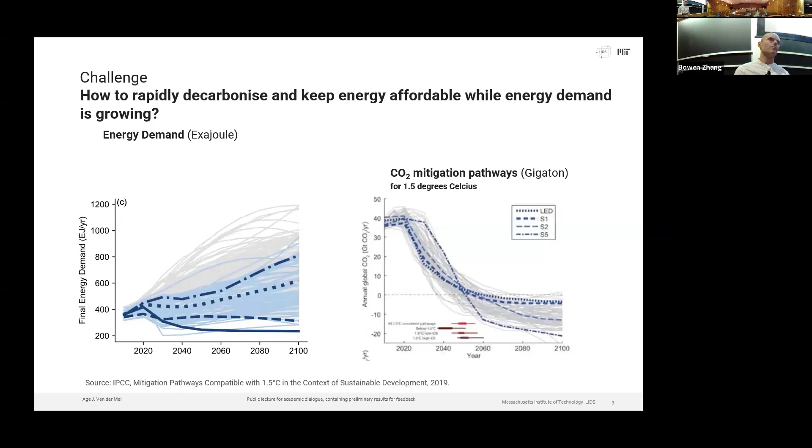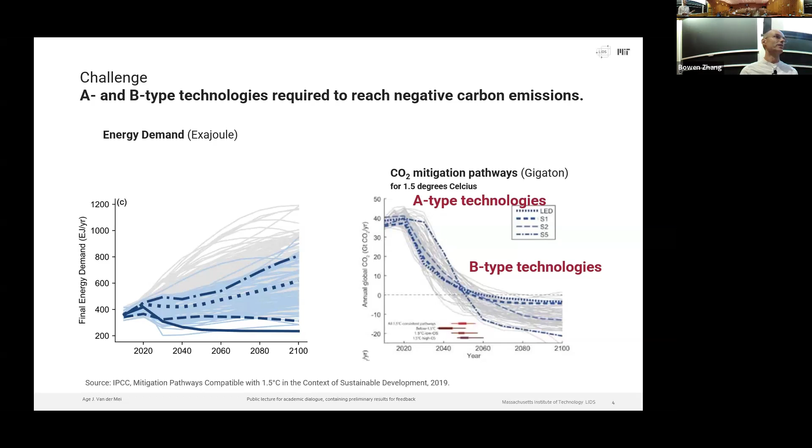Okay, what's our challenge? The challenge we're addressing here is, of course, meeting a rapidly increasing energy demand while at the same time reducing our CO2 emissions. This is going to take new technologies and the ramp up of the technologies we already have. So I love that distinction that the MIT conference is making, type A and type B. And today we're going to mostly talk about type A, about rapid scale up of solar, wind, batteries, and electrolyzers.

And this is a rapid scale up indeed. I looked up the numbers, and as these technologies are progressing, the rates of build out for the batteries and the electrolyzers are even faster than the build out of solar. And we all know that the solar build out is going at a tremendous pace. China last year reached a terawatt production capacity in solar. That's a number to really make us stop and think where this is going to go in the coming years.

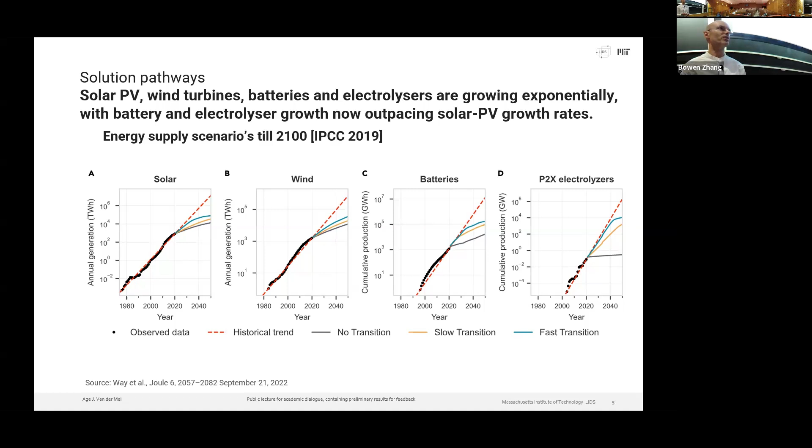First, let's look back. Because only through looking back can we hopefully look forward into the future where this is going. And this is actually the first large-scale electrolyzer in the world. It's a plant in Norway. It was 135 megawatts at the time, an alkaline electrolyzer. And it was used for industry purposes, so ammonia production.

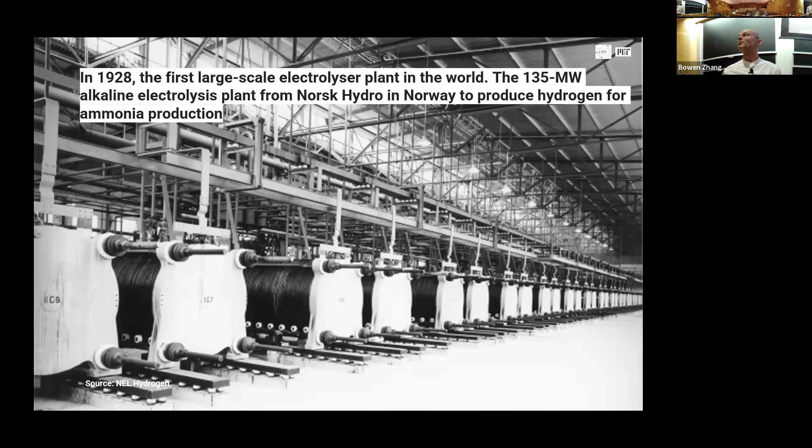And as you see, it's very similar to the modern day electrolyzer, which looks like this, which is part of a 500 megawatt plant that's being built in Texas. And this is the scale level. So hundreds of megawatts is becoming the new normal for electrolyzers.

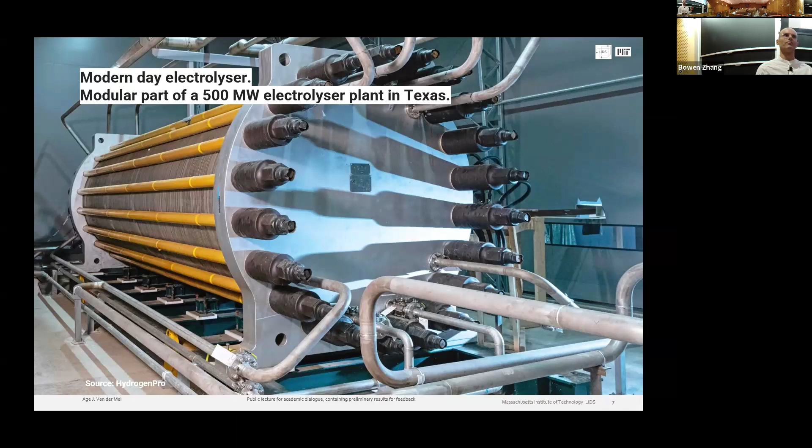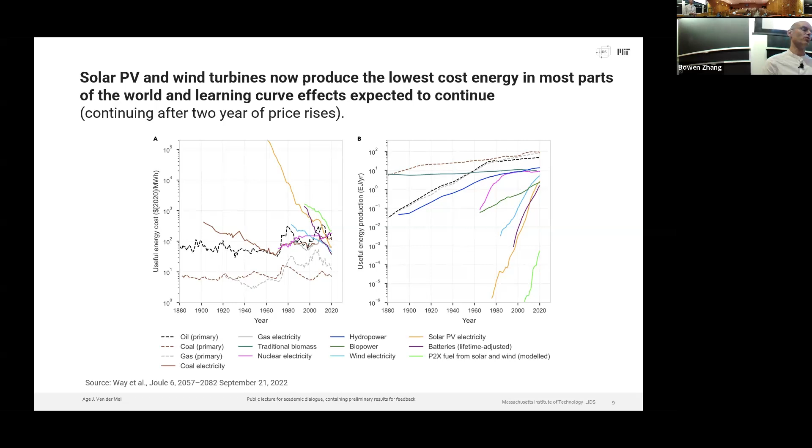And what is driving this is, of course, this rising energy demand, but also the rapid drop in investment costs. So I'm here showing this cumulative cost drop on the left side. Solar, but also wind, is coming down on a logarithmic scale, even surpassing the costs of fossil fuels at the moment, and the electrolyzers and batteries are not very far behind.

All right. And then policymakers are catching up to this. There's a target for 10 megatons of hydrogen and 10 megatons of hydrogen imports that should all be renewable for the EU. These are enormous amounts. And this is, of course, driven by the problem of sourcing natural gas in Europe at the moment.

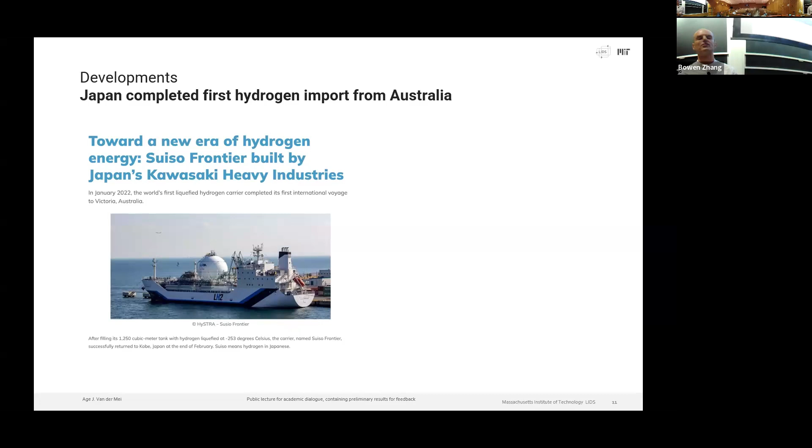Another important development that I want to highlight is that Japan has been importing the first hydrogen from Australia. This is a game changer. And it raises the question, how much import and export are we going to see of this hydrogen? But it's going on. And then quite quickly, the question emerges, at least for our team, where are the global low-cost sources? And where can we expect this very large-scale hydrogen to be produced?

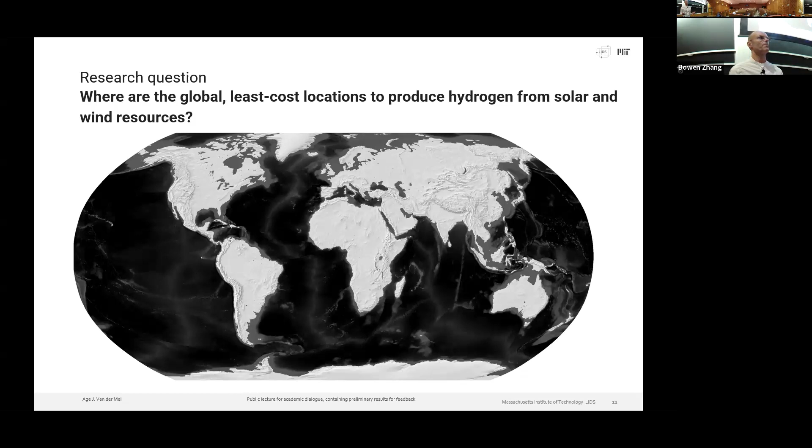Let's go into this analysis a little bit more. First of all, I'll share how we are tackling this problem. We've divided the world into a 0.25 by 0.25 degree grid cell. That's about the size of Greater Boston, so 30 by 30 kilometers.

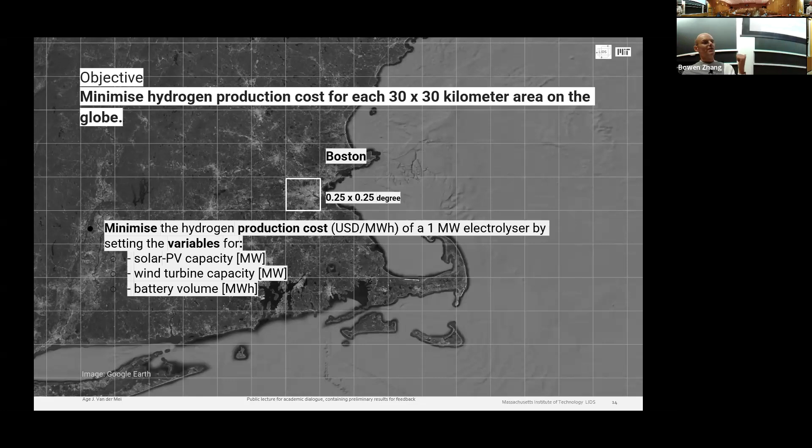And at that grid cell level, we're looking at 10 years of data for solar and wind, and then determine what is the optimal size for the solar PV, the wind turbine, the battery storage, and the electrolyzer system. And then we minimize the production cost of producing that hydrogen.

And to put that into perspective, I've here put up for us these grid cells, and it's not an out-of-this-world amount or size, because here we're looking at one of the largest solar plants in the world. This is the Bhadla Solar Park. It's in India, in the north, and already it's at 3 gigawatt solar.

And you see the size, it's in the top of the white box I'm drawing and at the bottom right. And it shows the size of what we are already now building out. And this is just the start.

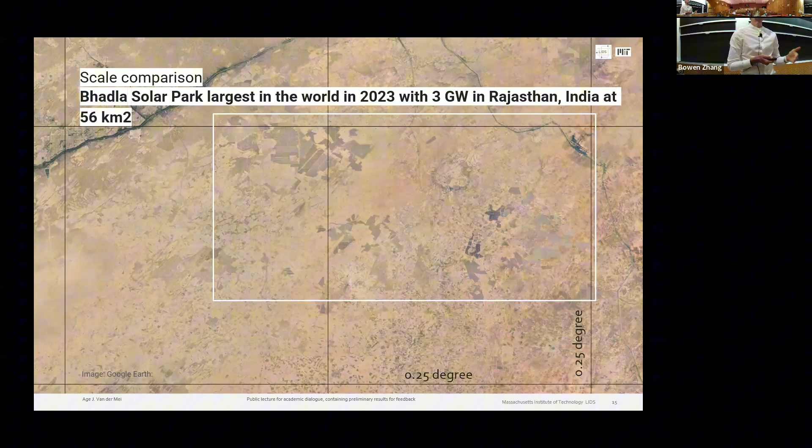So continuing on the method, because if we are looking at a 30 by 30 kilometer grid size, we have to do that for the total world. And that requires a formulation of the problem that still allows you to optimize every location. So this is how we approached this problem. We have the input data. We first determine the capacity factors, wind turbine, solar PV. Then we determine the daily optimal battery storage, and that goes into the optimizer for each location.

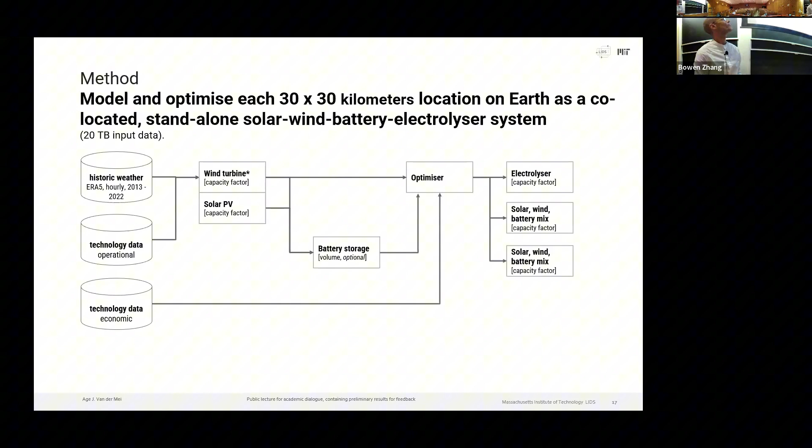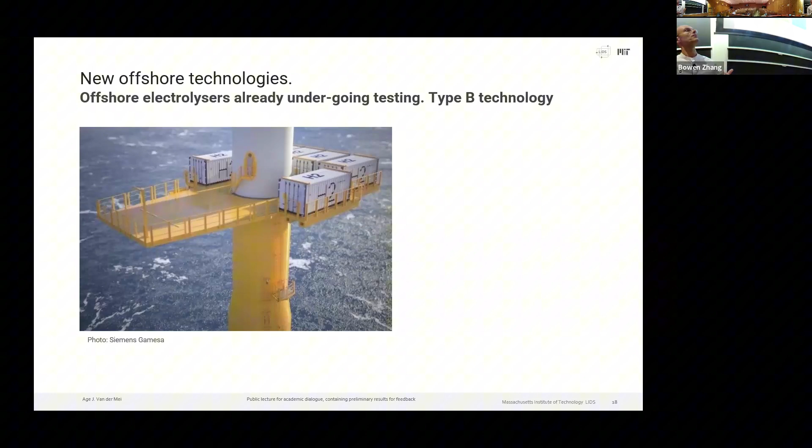And then we're looking at some new technologies as well, because we're including offshore wind, offshore solar, and also offshore electrolyzers. And here I'm showing a picture. It's from Siemens, where they are testing putting the electrolyzer offshore on a wind turbine.

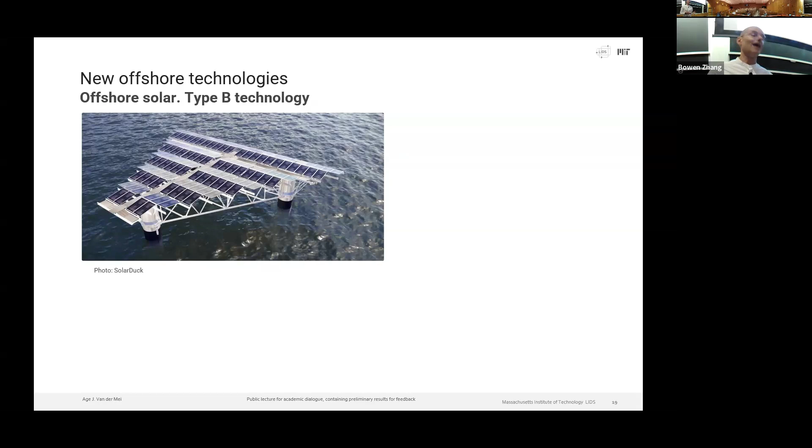Another example is offshore solar. And of course, we had solar on lakes already. Indonesia is putting up quite a lot of solar on its lakes. But solar offshore at sea is also a technology that's under development. And currently in the Mediterranean, there's a 100 megawatt project in preparation that's off the Italian coast. So this is coming. And I was surprised to see the speed of these developments.

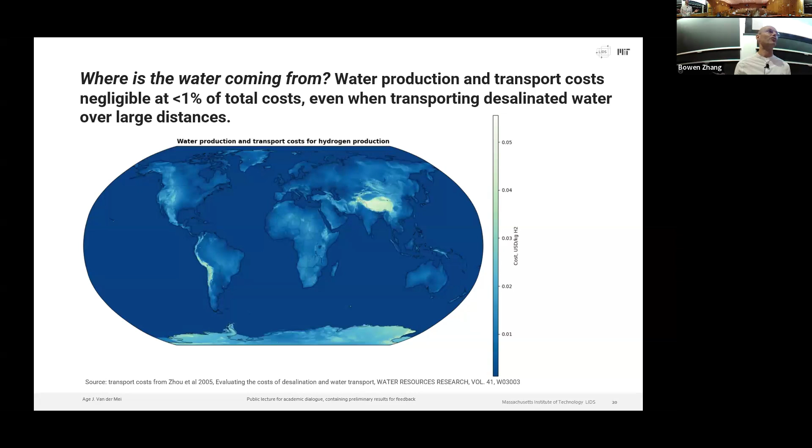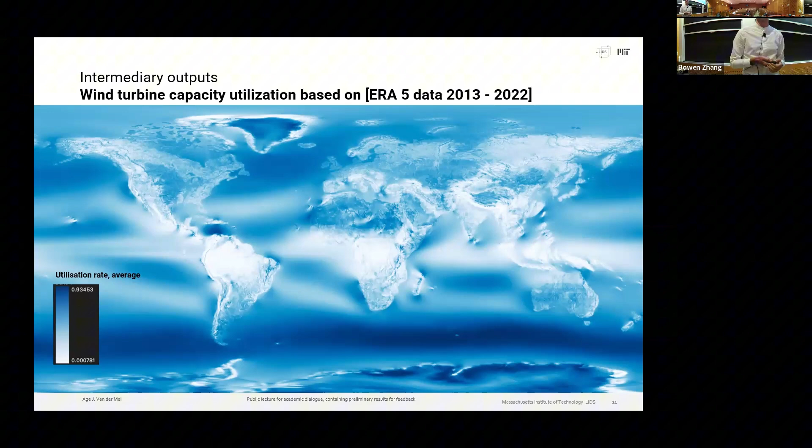And what struck me is actually what enormous capacity rates, so outputs, you could get in the southern latitudes on the ocean. Of course, we're not building there in any sensible way at the moment, but the sheer difference that the wind factor is making on the electrolyzer output. And I think this brings us to one of our insights there, is that wind is a very important part. If you have a good wind resource, that's really going to help you produce a lot of renewable hydrogen. Right.

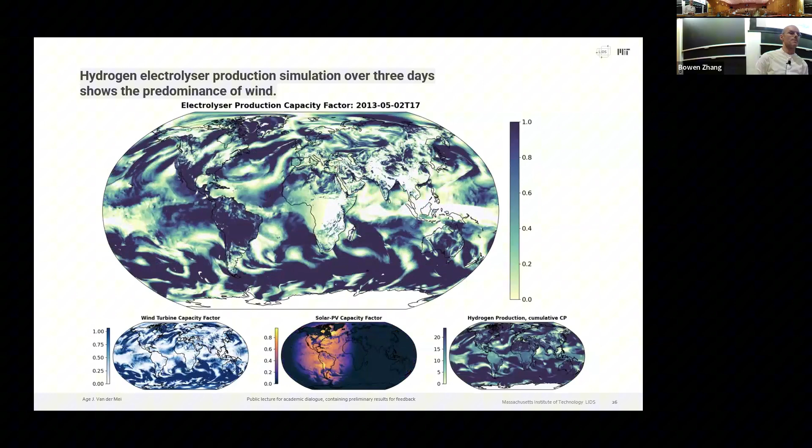But what about storage? Because storage is in this system setup. Now, we looked at the optimal storage size for every location, and at the current economical cost, so the investment cost for our batteries, lithium-ion batteries, we're not seeing any storage being deployed, which makes sense because it's a very expensive part of the whole system, and the storage would actually have the purpose of feeding the electrolyzer.

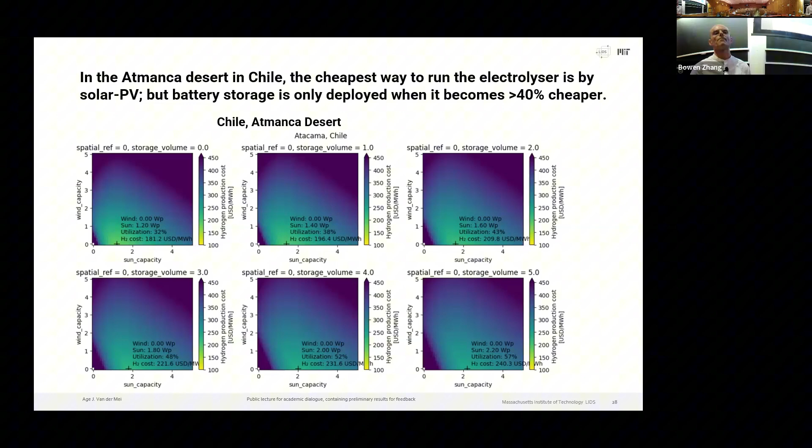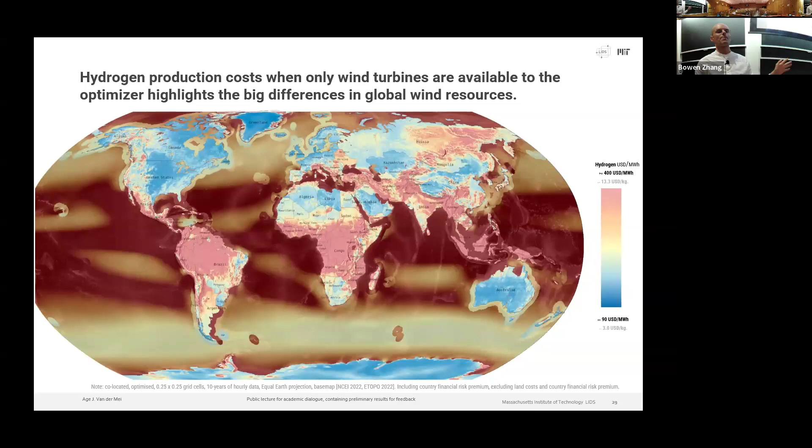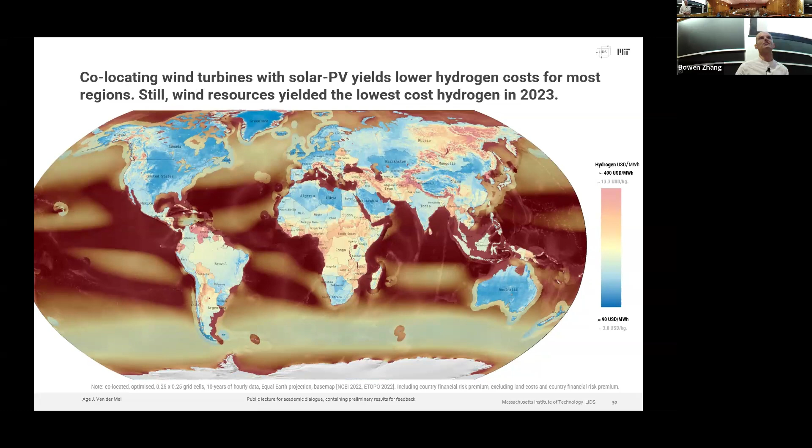And next, I'm going to show the map when also solar is included. And I think this difference is a very strong showcase that actually a combined system of wind and solar in a lot of locations, actually most of them, will bring you lower hydrogen costs compared to just wind by itself.

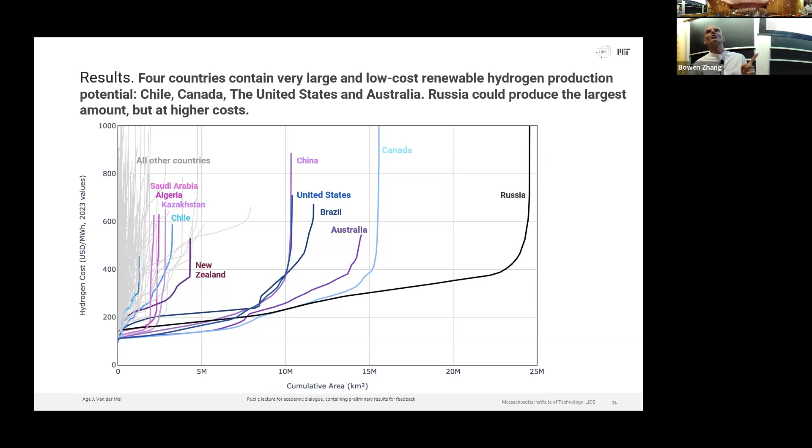But actually, quite a small group of countries would make up that very large potential hydrogen production. The interesting thing, of course, is when we look at the lower left quadrant, let us zoom into that point. So looking at the lower left, where we have the lower cost hydrogen production and a smaller scale on the x-axis, we're getting into view the low cost areas.

And the number one location, with the 2023 values for economics and the technology, would actually give Chile the lead in being able to provide low cost hydrogen resources. Followed at about $10 to $15 more per megawatt hour, Canada, the United States, and Australia. And then at some gap, we would see China, followed by the other countries. And that was to some extent a surprise, but also maybe to some extent expected, because Chile has indeed this fantastic wind resource available.

The bigger question, or the biggest surprise, was how large is the cost difference going to be? Because can we expect a future where we, just as now, import our oil and import or export our natural gas? Or is the future more like local production of our renewable energy that is not actually exported over large distances? And I think looking at the cost differences between the countries starts to highlight, and it will be the next step of the work, that the cost differences do not immediately lead to the conclusion that we will see very large amounts of imports and exports of renewable hydrogen.

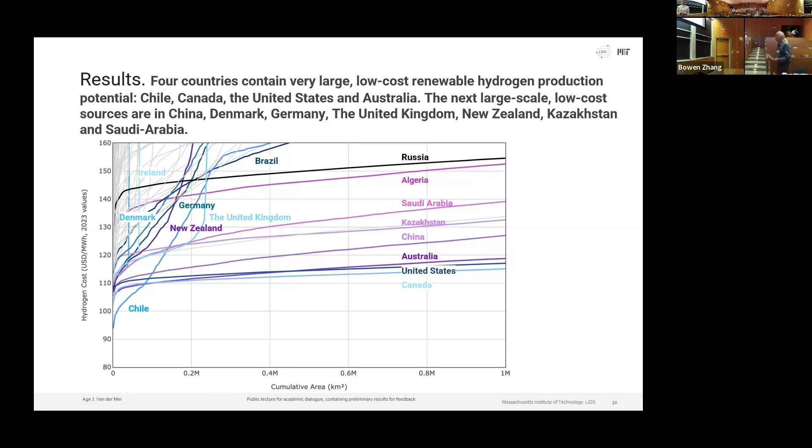We have two chairs. We can discuss that. Yes, of course. Okay. Should I wait for later? Yes, I think so. I'm sorry, just to keep to time. Thank you very much. Thank you.